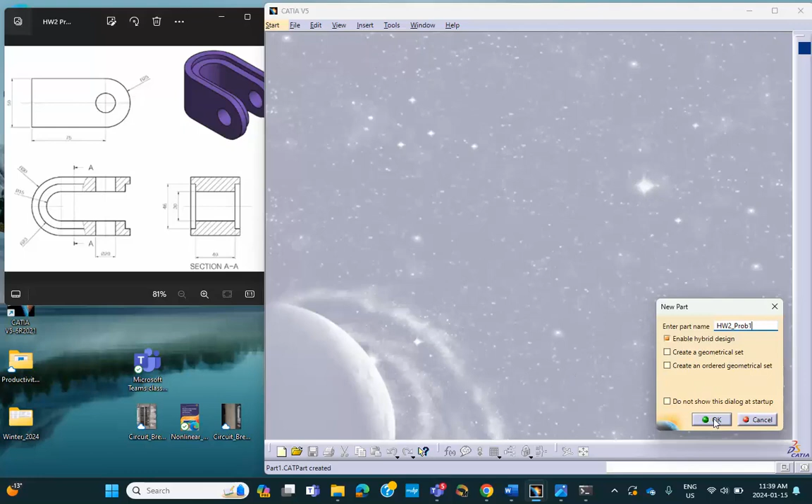All right, so on this horizontal plane I will sketch something that looks like so. Okay, let's not worry about these end pieces, like so. Let me not maximize it, so let me show what I have in mind. Where is this thing - profile. Okay, so draw that, and this. I'm going to clean it up in a minute.

Okay, let's put some dimensions from this point, from this line. Well, is this symmetric? Let's make sure that this is symmetric. That point control this line, we make it coincident so that it shifts that thing down. Now I'm pretty sure it's symmetric.

This radius is, I believe, 30. So let's give that thing a 30, radius 30. Yep, that's 30-ish, okay good. This one is, I believe, 20... 23. So this dimension is 23.

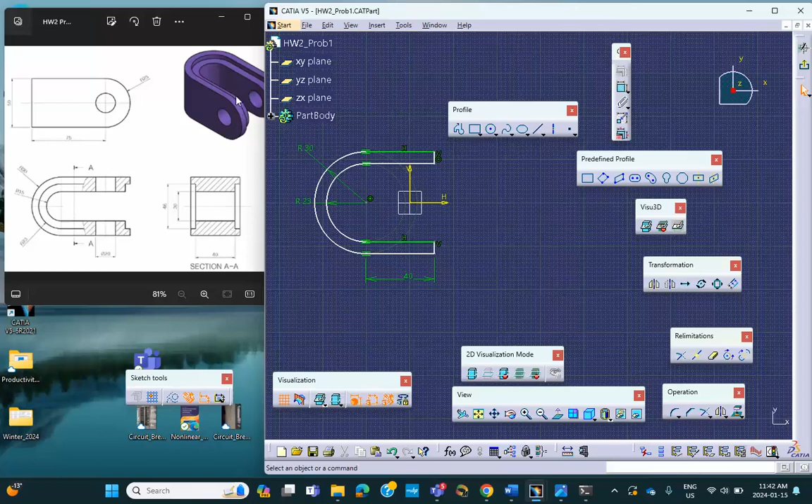Exit, and then pad it up in both directions by this height. And now that height is... wait a minute. This height is actually 50, so 25 in each direction. 25, we say okay.

Good, now I do exactly the same thing except for the inner piece. So on that plane, notice that we already have sketch 1. On that plane I'm going to sketch exactly the same story. So there are easy ways of doing these things, like using this sketch here to scale it down, but I'm not going to do that.

So let me go ahead and bite the bullet and do it the long way. Let me first do something similar to that. Sure, this is going to go - yeah, that's fine. At the end of the day, you have to create this part one way or other, and you all have your preferred way of doing it, and that's fine as long as you get it correct.

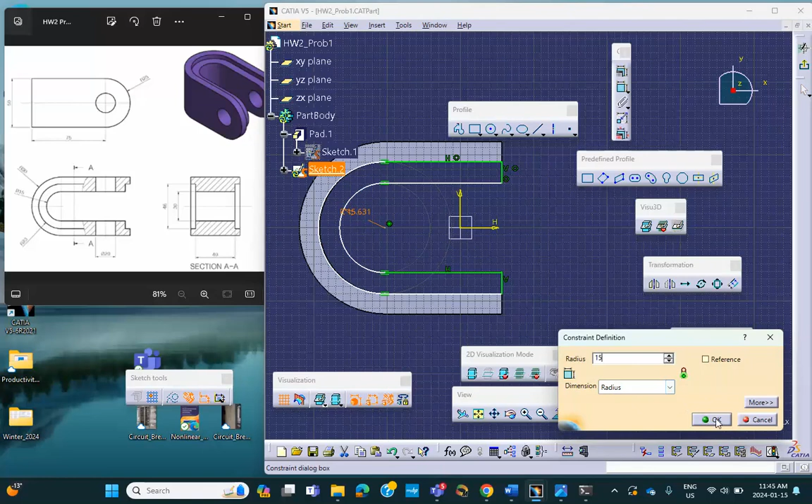So the pad height is not 25, but this distance, we have to figure out what it is. So let me see now. So that goes for now. Let me do it less than 25, and we'll figure it out later.

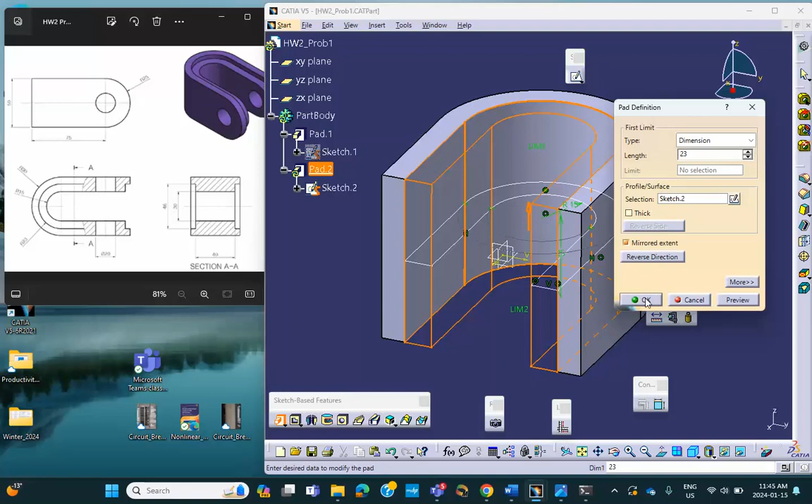Okay, so we go pad in both directions - not 25. Let me make it 23, because you have to look at the drawing and find out what is that height anyway. So I guess that's not good enough. Let's make it smaller, maybe 20.

Okay, this height you have to know. You look at your drawing and figure it out. Right now I'm not concerned about this. You can see that this height, from here to here, is 15, and from here all the way to the top is 25. So this must be 10. This must have been 10. So this is 10.

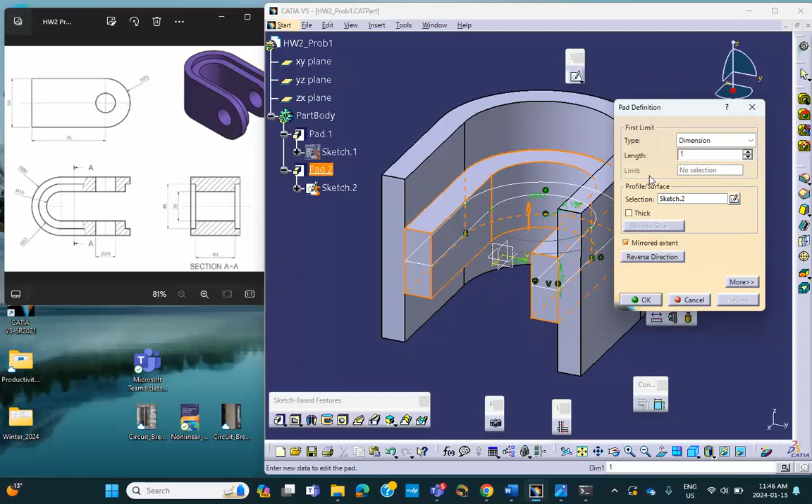Let's check 10 in preview. That's too low, obviously it's not 10, so I'll leave it at 15 for now. We'll figure it out later. Yeah, definitely it's not 15. Let me put it back to 20.

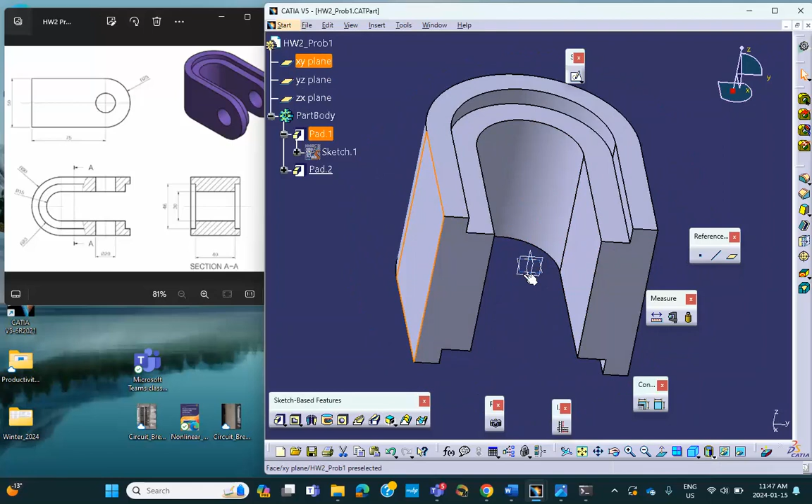Okay good. Now, on this face, see that? Or let's put it like that. On this face I will sketch this circle, which has a radius of 25. So let me draw a circle here, maybe use half a circle, like that. We'll dimension it in a minute.

Actually, I'm going to make my job easier. Try it again, at 90 degrees. Okay, so this is, I'm pretty sure, looking it up. Okay, this radius is 25.

Okay, and I want this thing to be coincident with that. Actually, let me close it because later on I want to pad it. I want this to be controlled with that to be coincident. Oh, cancel, cancel.

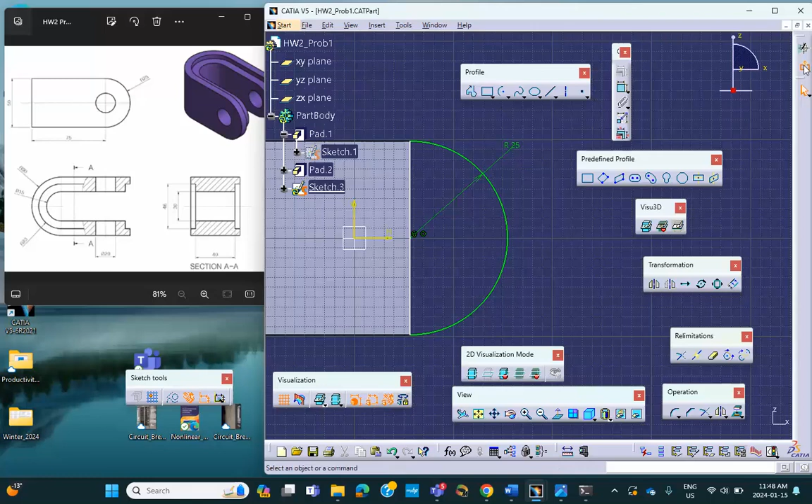Let's see now, this point, control that edge to be coincident. Okay good. Exit, exit, pad it, but in the other direction, up to that plane. So up to this plane, and this is the plane.

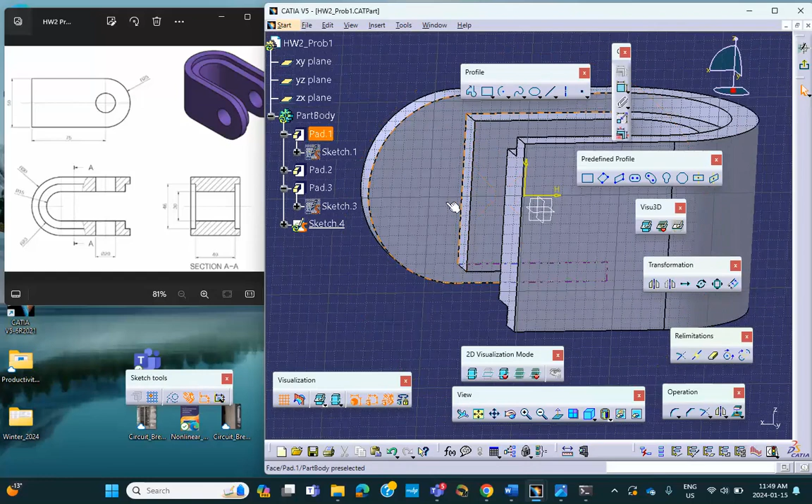So far so good. And I'll do exactly the same thing for this other guy. For example, on that plane I will sketch, exactly the same strategy. So let me look at the drawing, normal view. Same story.

For now I'm going to do half a circle, like so. And that radius, based on the drawing that I have here, is half of that, which means 20. So let me dimension that. 20. Let me say okay.

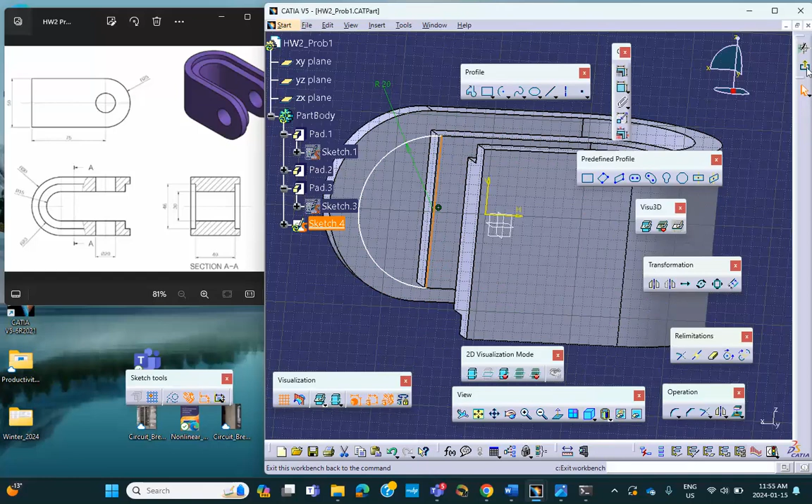And now we're going to close this. So let me look at a line from here. These are exactly the same steps that I'm following, just like the one I did for the other side. Exit. Okay, and then pad it, pad this in the other direction, up to this plane, up to this plane. Okay, we say alright.

So that's what we got. Now these two, I've got to mirror on the other side. Okay, so let's find out where the mirror is. It's under transformation probably, that I can't find it.

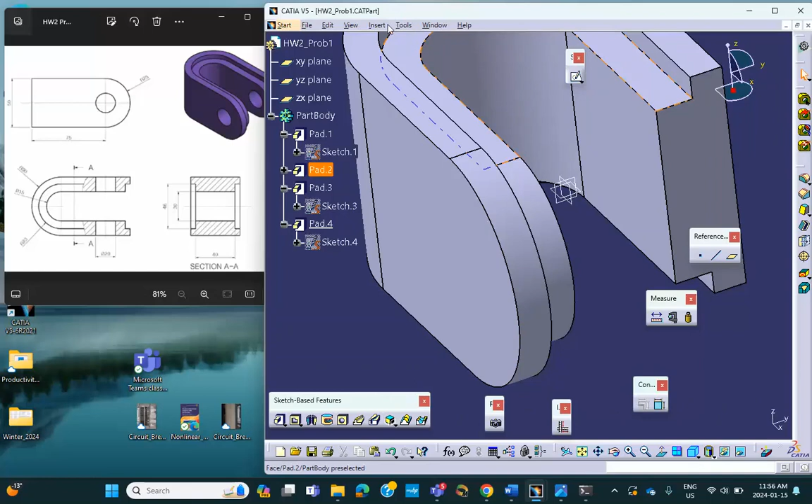Either I have to reset this stuff, or if you know what it is, let's go and find transformation. So view, toolbars, let me see, not these. Boolean, dynamic, insert, measure, reference element. Let's go further down. Transformation, right there, there's the mirror.

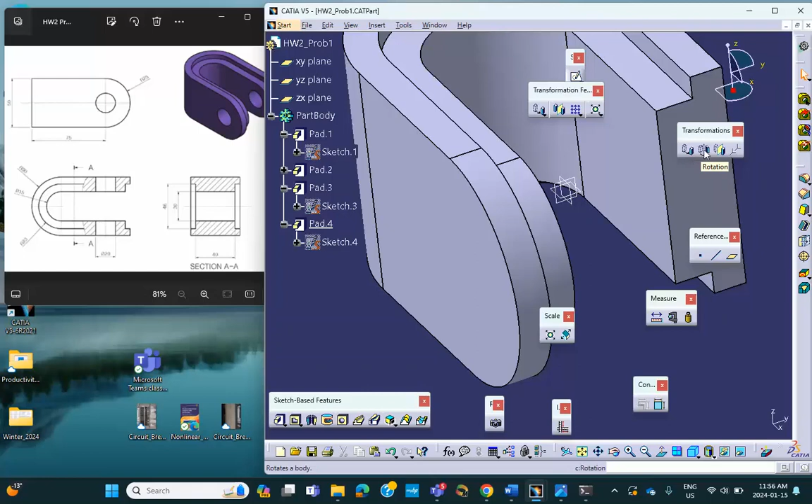Okay, otherwise you have to reset this whole thing. So mirror, we can mirror. Cancel. You know what I should do? Maybe an easier way is to actually split this thing and then mirror it later.

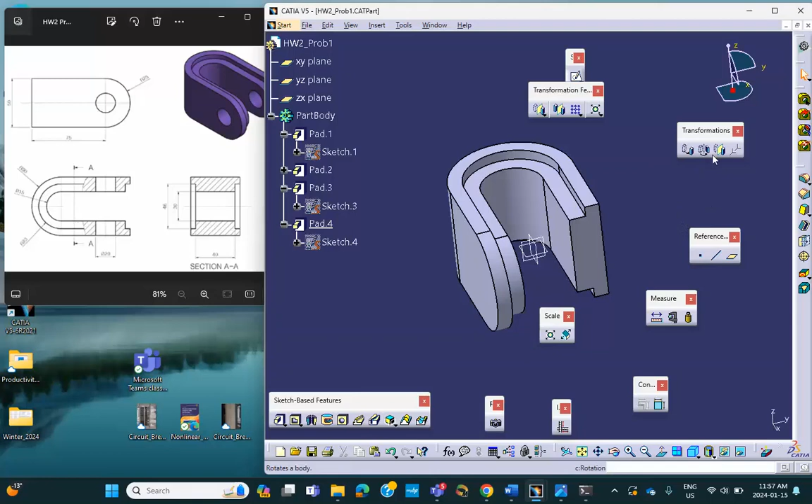So let's go and find the split. The split is right where, it's another one of these operations. So let me see if I can find it for you. I'm looking for a saw and I don't see it here. So it's one of those things that I probably also erased, or not erased, I closed it. Let's see now, if we can't find it, no problem. We have no choice, bite the bullet and go reset the whole thing.

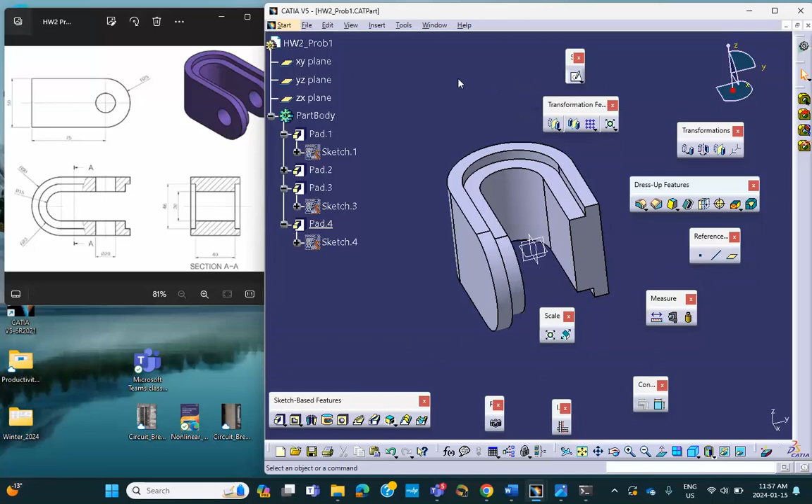Tools, customize. Toolbars, restore all contents. Restore positions. No problem, so right there.

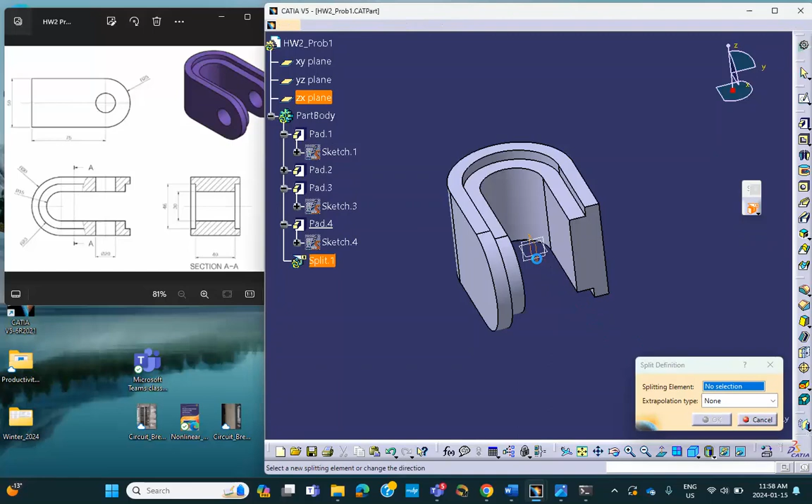You see that? See the saw? Split with respect to that plane, keep the other side. That's easier to do. That's why I was originally intending to do half of it.

So on that face I will sketch now that circle that we want to make a hole. So let's make a full circle here, something like this, and we make it coincide. What's the radius of that thing? The radius of this hole is 10, or diameter 20. Okay, so diameter 20.

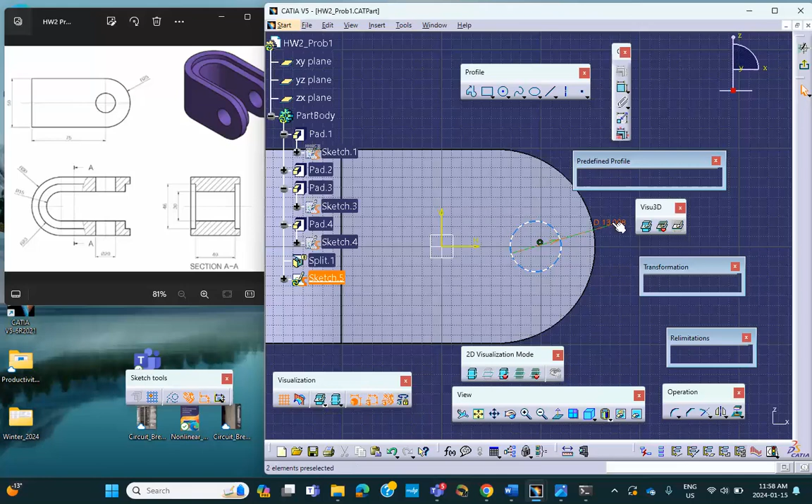Okay, and make sure that these are concentric. So this circle, control that circle, concentric. Good, exit. Very good, pocket.

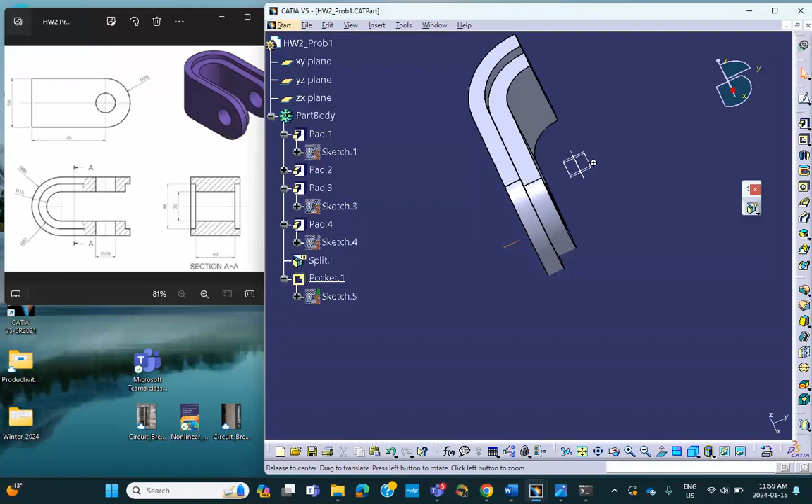There we are, and now we mirror. So let's go ahead and mirror the whole body. Let's get these things out under transformation, remember how to find it. Mirror with respect to this plane.

And we say okay. But I'm sorry, there is no other way to do it, you just have to go ahead and do it using your strategy. Notice that when I started the problem, I did the full thing. It involved more work, so eventually I came back and cut it and then mirrored it. There are no easy ways. Some of these problems are very simple and some are not. Good luck.